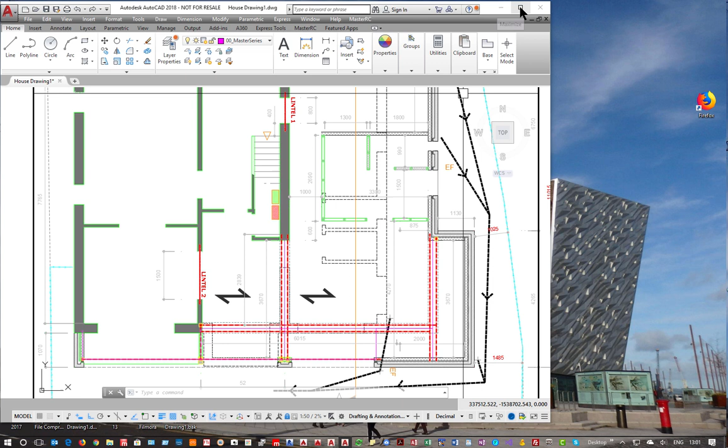I have a little AutoCAD drawing that I've already created for the MasterSeries project. This is a house extension, so I won't go into too much detail. We're extending this out to give a larger first floor area, and then the walls continue up as normal here and here.

I've created an additional layer where I've drawn the members I want to import. If I go to this and change that, it pops up over here, I can change the color, say to green, and say OK. Now you'll see all those structural members I'm going to use are in green. I've just put them onto an isolated layer.

So my first stage is to save this as a DXF drawing, and I'll call it DXF2 because obviously I had a practice. I'll save that, and now I'll exit from the drawing, say yes, and we'll save it as drawing 2 as well. Why not?

Okay, so our next stage is to go into MasterSeries 2017-14 from the 22nd of February, and I am going to import. Now we're dealing with PowerPad licenses, so I'm able to import DXF, but I actually can't import IFC - it should be grayed out. So I'm going to import a DXF file.

I placed it on the desktop so I can quickly delete it. There's my new drawing, and say open. I'm going to bring in the layer called MasterSeries and nothing else - all the lines and polylines - and I'm happy to put it into my U drive. I'll extract. Off it's going, looking through it, and it's found 12 members. I'm now just going to load that frame straight away.

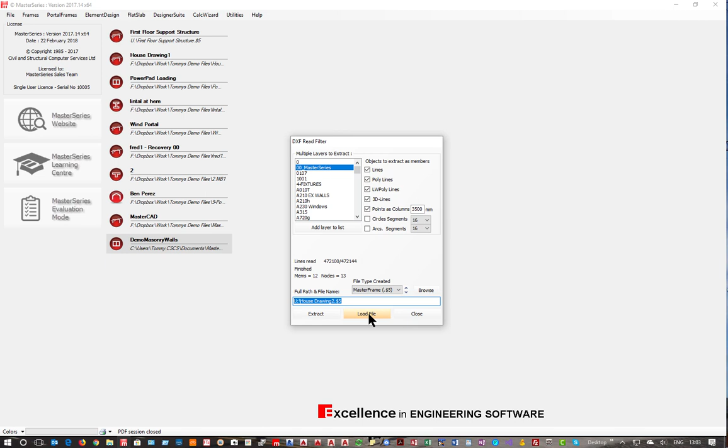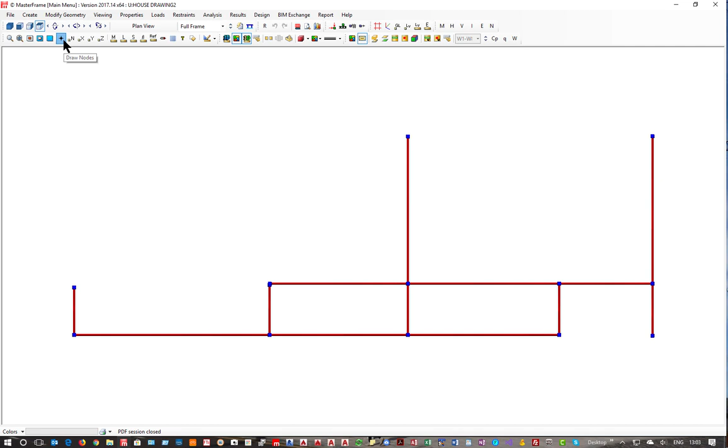And here I go, there is my basic outline of my frame. So what I need to do first, because I didn't draw this very accurately, is tidy up some of the values and dimensions. If I put my nodes on, you'll see where they are. If I put my X values and Y values, you see there's a bit of alignment problem here and here and here. So I'm going to do some X-axis alignment.

So: modify, change, and set all to the common value. Those two are okay. I want to work with these two, and I'm just going to reduce the lines to fine. So I'm going to take these two values and set the X coordinate equal to this - very quickly I make those the same. Those are already the same, and those are the same, and those are the same. So that was the only X coordinates I needed to work with.

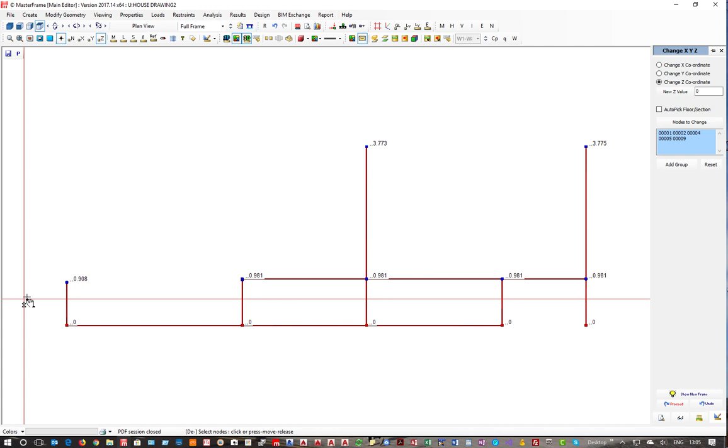Now our Z coordinates, because Z is our other plan dimension, are all jiggly-piggledy along here. So I'm going to come along and change the Y-axis coordinate, reset all of these, and make them a new - not Y but Z - value, and say proceed. So they're now all flush, and these are all more or less in the same line except for this one, so I'm going to do a reset.

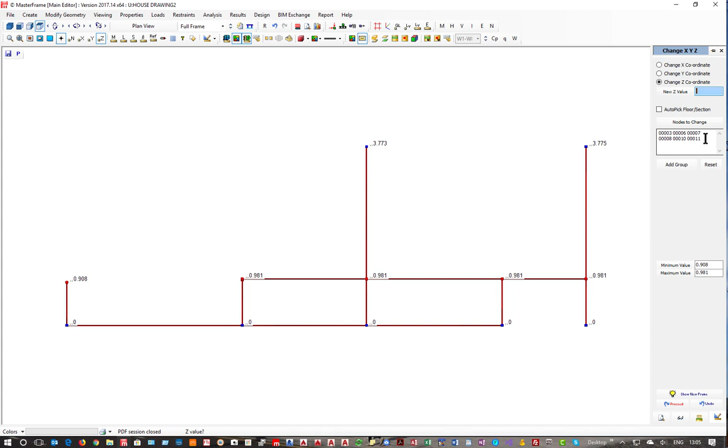I can just take the one I want to modify, but let's take all of them to ensure they're all right, and then choose that as the new value. It's a wee bit fine, so I'm going to make it a meter exactly, and just rejig that about a wee bit, and say proceed.

And then these two here are outside each other. So I'm going to take this one and we'll make it 3.8 meters, and then I'm going to reset and take that and say proceed. So they're now all correct where I want them.

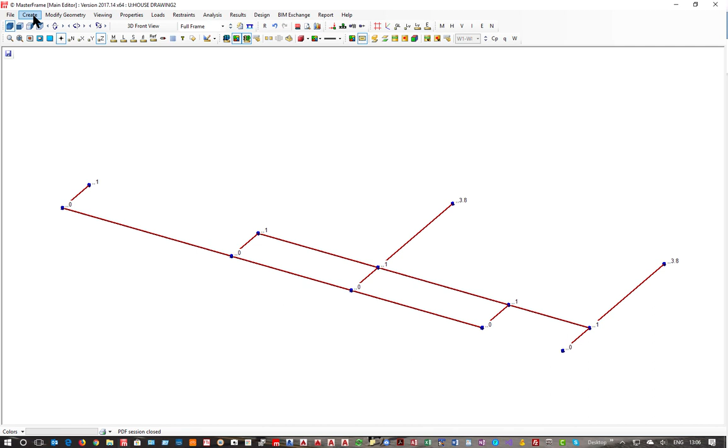Now my next stage is to put some columns in because I just have the first bit. So now I'm going to add some columns. I'm going to create columns, and in this case they're going to be square hollow sections. Coming down and make these 100 by 100 by 3.6, and I'm also going to put them in at 2.5 meters high. I'm also going to add them into a member design group called columns,

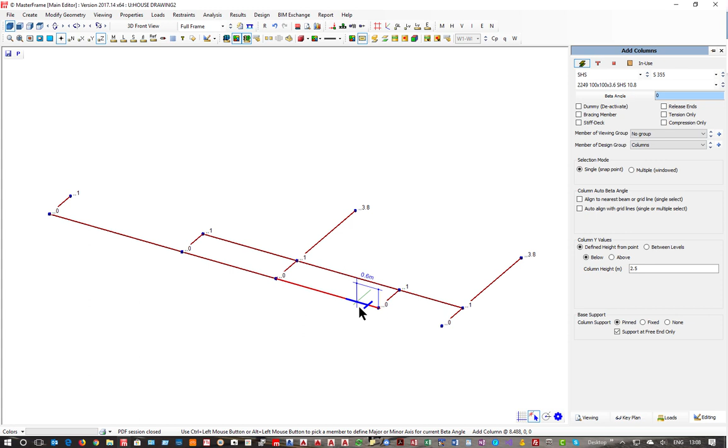and this is something that's new to the PowerPad, in that with the 2018 version of the PowerPad we have upgraded its functionality to include the pro features of MasterFrame, and I'll talk about that as we go along. So first things first, we need to put a column there, and one there, one there, and one there.

And now I want to look at my supports. So I'm still in that column, turn that off, go to restraints, static supports, and I am going to kill all the static supports that exist at the minute. I delete those, delete those. These will be fine, pin with a torsional restraint. I'm going to add in a second set, and it's going to be fully fixed because I will actually do the pinning at the ends of the members as I require them. So there's my 4 supports.

So we're going to span from along here onto this one. So this member and this member are going to come onto this one. So now I'm going to put in my member end releases. And I'm just going to come down and pin all of them here and here. And you'll notice I'm getting something strange happening there, which we'll look at in a minute. So I'm going to have to come back, and while I'm here I might as well do these. See, that's looking at the whole length as one.

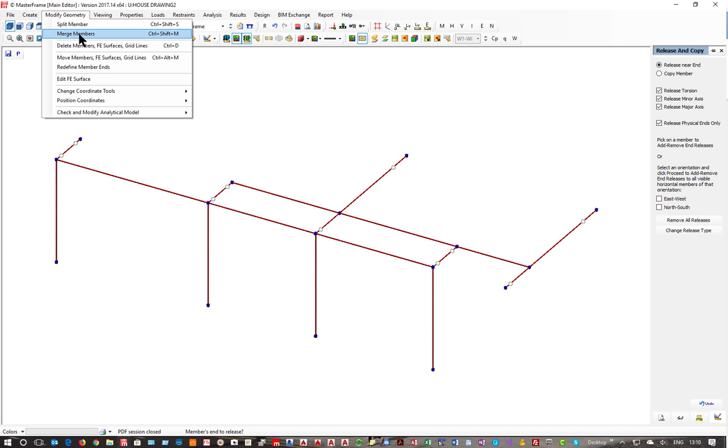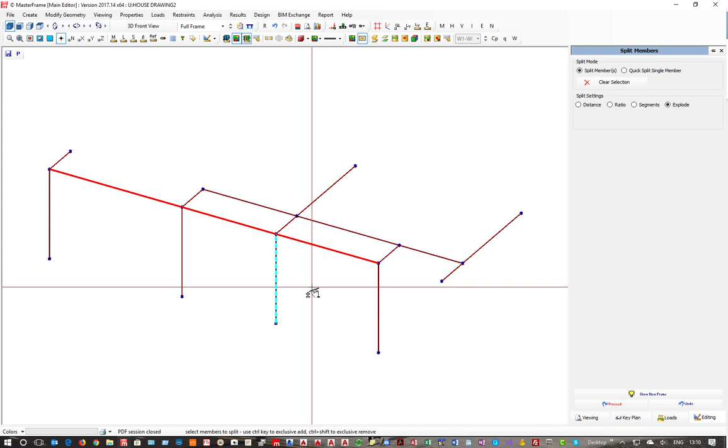So what I'm going to do is come into member split, and I'm going to take this member and explode it into its component members and say proceed. So you got 1, 2, 3. Now this is one member, that's good, and that's a single, and that's one member. That should be a member from there to there, and that should be a separate member. So I am going to take this member now, clear the selection, and explode, proceed. So that's one and that's one.

Now I'm going to join these two together. So member merge, and one of the loveliest things is what they call the quick merge, from that node to that node. So what have we got? If we use the shrink, we will now see how our members are connected to each other, what are real members and what are not.

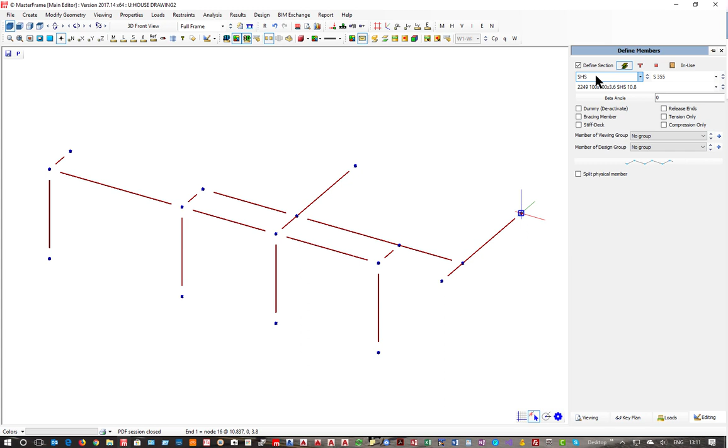And what I do need to do is put an extra member in there I forgot to put in. So I am going to go to create and add a member, and it will be a UC, probably something around the 152s. Let's work with the 152s initially and put that in there. So now we can come back and do our pins.

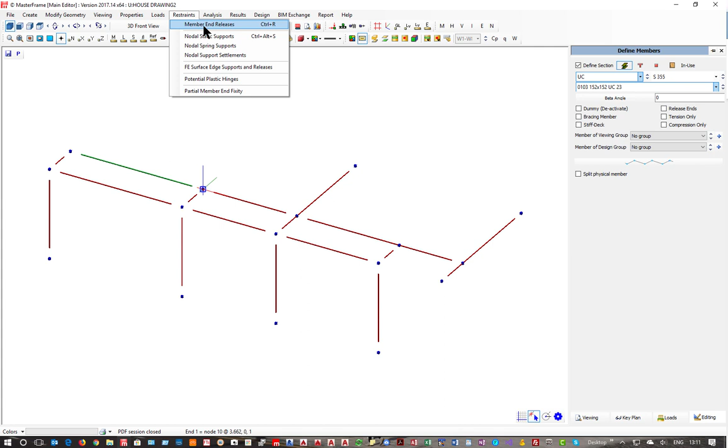So restraints, nodal member end releases. We've got that one. We need to put one there. Sorry, fully pinned there and there. That one's okay. Need to do that one, and that one, and that one, and this new one. So that's that model created from a member point of view. Obviously there are some more things going on to get the loading onto it, but those are essentially the members that I need to use.

And the advantage of doing it this way is that we get the realistic deflections from this member loading onto this member. And this member being supported here may be stiffer than over here, so therefore we get a difference in the deflections. We also then are able to do the connection design automatically, and we'll be able to do our columns, our pad foundations, and our base plates all interactively. And that's why we don't do these one member at a time, 11 beams and 4 columns individually.

What I like to do at this stage, because I've got everything here, is just to analyze it quickly. There's no additional loading other than self-weight, but this will tell me if the frame is stable. And obviously at the moment I actually need to put some properties, so section materials.

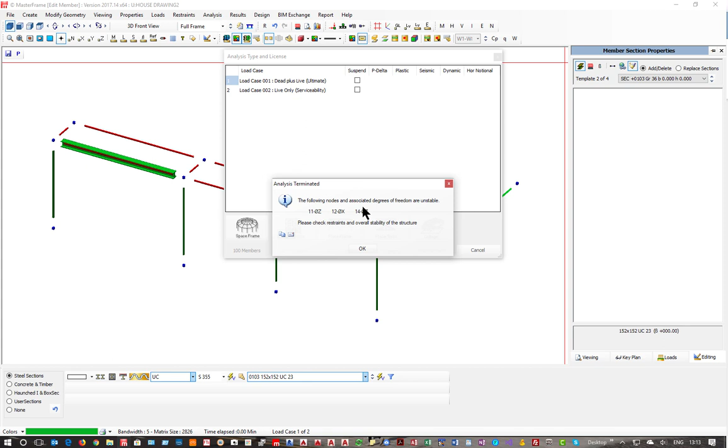And we have 3 unstable nodes. And I know it's here, here, and here. That's because these members here can't be pinned over both ends. We need to put a torsional restraint when we have what we call a physical member that's got nodes in the middle. So all I need to do is go to restraints, end releases, and I need to take off the torsion on one of these two, one of these two, and one of those two.

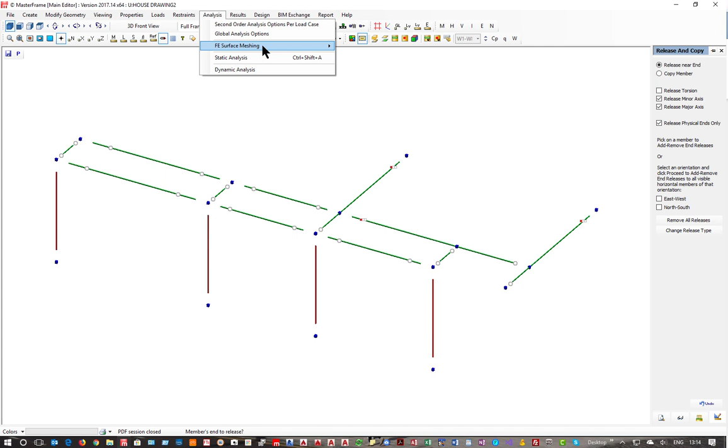If I reanalyze, we should get a solution and results, graphical bending moments. Now this is very, very small resolution because it's only self-weights, but this gives me an idea of how the structure is working before I move on. So I can see that everything looks fine there. It's working the way I think it should work. And also from a deflected shape point of view, nothing is moving out of plane in any crazy way. So now let's go and do our loading.

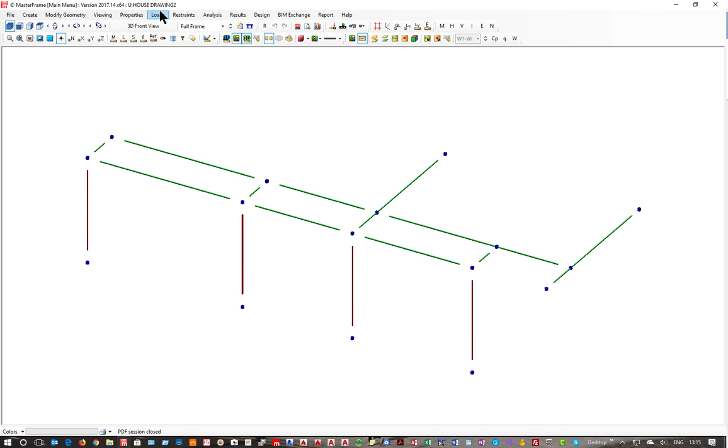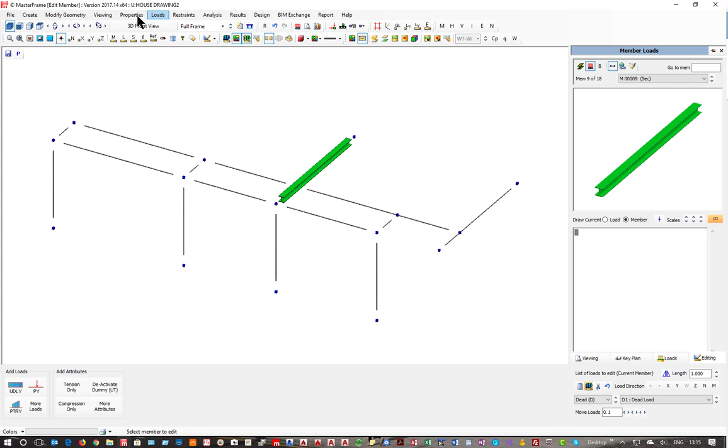Traditionally you would have come along in PowerPad and put the member loads in by going to member loading and put some loads on this member and that member. What I'm going to do is I'm going to apply area loading. That's one of the big new things from the MasterFrame Pro part of PowerPad for 2018. So all I need to do first of all under loading is go to default loading,

and I'm going to use area loading, and I'm going to say my dead is going to be 1.5. So that's not my dead. What's my dead? It's 0.45, I think, if I remember rightly. Let me see. Yes, dead is 0.45 internally, and the live is domestic 1.5. We won't worry about this bit here because this has just got a roof at first floor level because the building steps back in again for the upper walls. And that's all I need to do there.

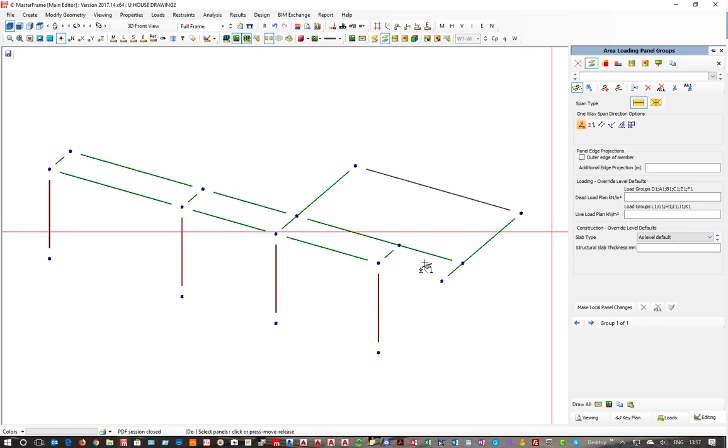What I now want to do is to create my panels. So I can come along and start to create my panels. And immediately I come across a problem, and my biggest initial problem is that I don't actually have enough members. I can do 1, 2, 3 panels, but nothing else. But one of the things I can do is I can add a dummy member. So I can add a dummy member between those two. And here's where I start to get smart. So I can now create that panel. I can add a dummy member with a right mouse click between those two. And that allows me to create that.

Now out here, I actually have a wall along here. So I'm going to do a little trick. So I'm going to add in a dummy member. And I'm going to go from here. Yep, snapping to that point. That's good. And then I'm going to do a right mouse click and add a dummy member from here to here. Right mouse click, add dummy member from here. Yep, that's good. Add dummy member from here to here.

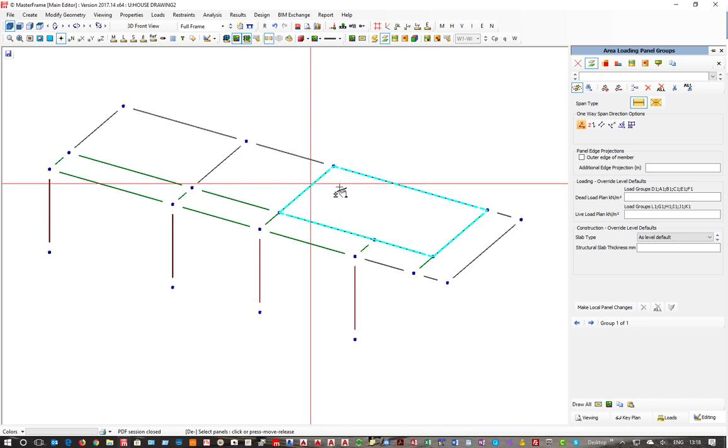What I now need to do is put this internal spanning, so from here to here to here is all with the basic loading spanning that direction. So what's going to happen here is that this load will come onto this dummy member, and from the dummy member it'll run back to the 2 nodes, and of course that node's got a support on it anyway, and that node will have a support on it, so that will then just be forgotten about because it's looked after by the wall that's underneath, and we're not designing that. That wall actually already exists anyway.

So the next thing I want to do is the outer bit, this extension bit. So I'm going to add, that's the inside, and then what I'm going to do is I'm going to add another one called outside.

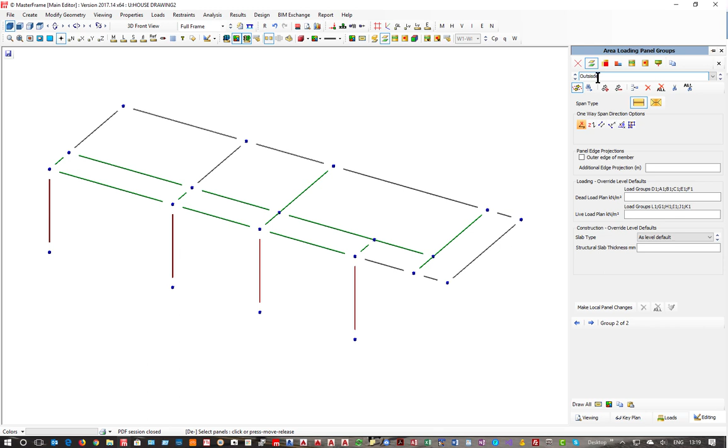And then I'm going to come along and highlight these. Of course they're now spanning the wrong direction - well, that one's spanning correctly, that one's not. I could change the direction, so that one's now wrong, or I could just say, use the shortest, and in this case it works.

I do have the facility, obviously, to override any of the panels, for example the direction. I could have changed it so that direction is XX or YY or back, or not override, so it's now working properly.

So those are all going to track their loads, but in this case I want to change the loading. We're not making changes, so we're doing an override load, and the override load is quite interesting - it's a lighter live load, but a heavier dead load because of the tiles. So the dead load is 0.6 kilonewtons per square meter, and the live load is 0.75.

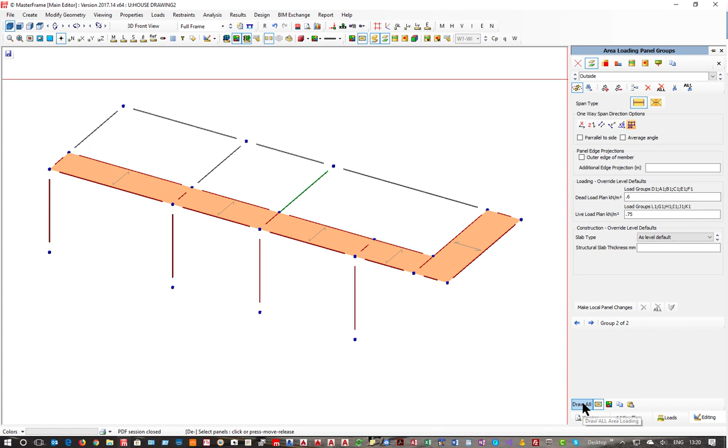So if we look at our areas and draw both of them, draw all, we will see they're different colors, different intensities, and spanning different directions.

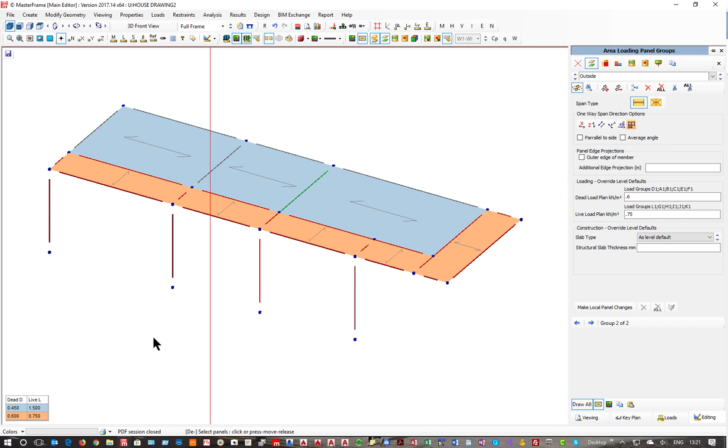So all we need to do now is to stabilize all these dummy members. We can do that quite easily by adding in some more static supports. If we run down to our fixities, we need to put a dummy support here, here, and here, and everything else is then supported directly or transferring to another member.

So that is my area loading. The next thing I want to do is apply the two wall loads. So if I have two wall loads here of 10 kilonewtons on this one and this one from the walls above - under loads, line loads, and in apply mode I'm going to call them just walls. I'm going to apply it there and there, and say it is a dead load of 10 kilonewtons. There it is.

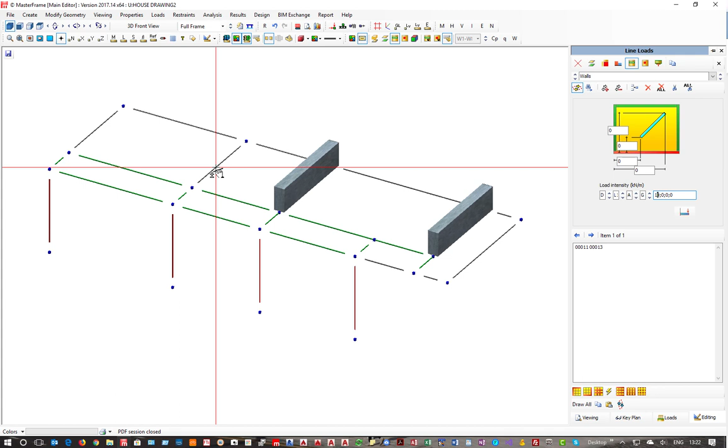And then what I'm going to do - it wouldn't even matter if I put a wall load on that one, because it's going to go from the dummy member straight down into the two fixed supports which simulate the wall underneath. I'm going to add another one, and this is going to be wall and roof, all the way along here, here, here, and here.

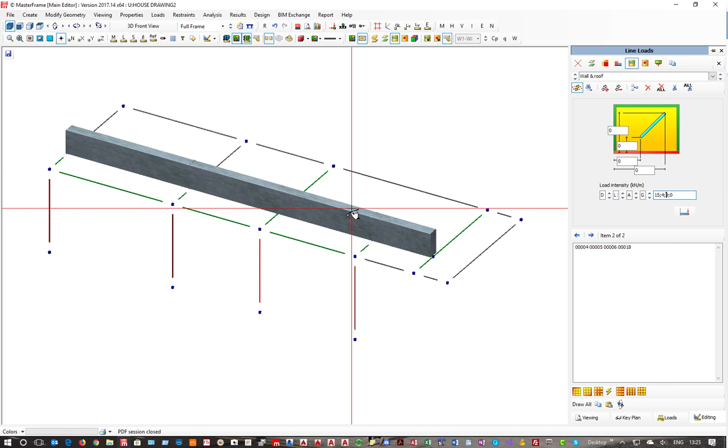It never draws anything until I start to put values. So I am going to put 14, and I'll make it 15 actually, and 4 for the live. So it's getting a 4 kilonewton live load coming onto this wall and down onto the beams, plus the self weight of the wall, plus another 5 kilonewtons for the dead load of the roof structure as well.

So now, what have I got? I have, in essence, all my loading applied.

What I now want to look at are loading cases. Because I'm doing domestic, I don't want to have too big of deflections - I want a dead plus live service case. So I've got automatically the two cases here, and you will see that it's 1 and 1.35 as our standard Euro code information.

And what I'm going to see is that it is going to add another one of those. So I'm going to come back to the cases, dead plus live ultimate, and just say add service. So it's going to create me a serviceability case of 1 and 1 for the dead and live.

And because this is a small domestic project, we don't need to worry about any stability, because it's all going to be attached to the walls and bracing, and it's not going to go anywhere. So it's just all vertical loading I'm interested in.

So the next thing, you would normally run along now and design it, but I want to take a step back before I design, and I want to create some groups - again, a pro feature that is now available in PowerPad Plus.

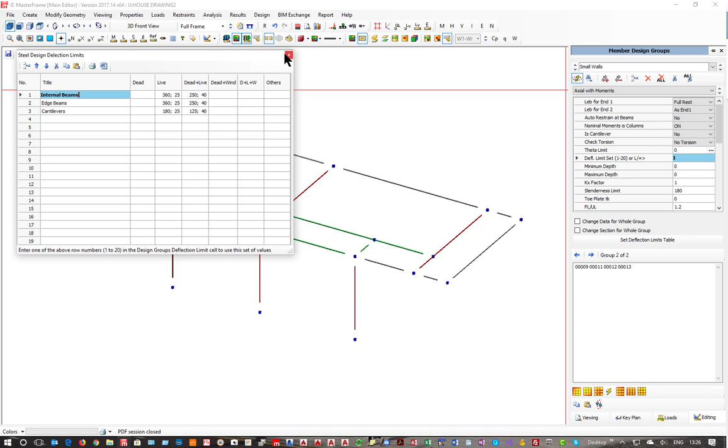So we're covering it because dead is more critical quite frequently in domestic situations. And we're going to set a maximum depth. I can tolerate a 203, so I'm going to set 225, and I want both of those to be the same section size. Now also they have loading coming up on them, which we'll look at in a minute, from the walls.

So I'm now going to do the other one, which is the big walls. And I'm going to take this one, and this one, and I am going to say that it's actually unrestrained because it's running in the same direction as the floors, so I'm not going to rely on this stabilizing it. So I'm going to say it's 1L, and I'm going to say it's restrained at incoming members.

So yes, so this one here, which is longer, will be restrained by this. Or we can say no if you want to be more onerous, play safe. I can say no. Again, deflection limit I'm going to set as table 2, and the maximum I'm going to set as 225. So done those, done those.

I'm now going to come along and add in a group for my front members, and they are going to be that one, and that one, and I'm going to just say they are going to be 1L and leave them at type 2. Now, same section size for all of them, and again I want to keep them smaller, so I'm going to set the minimum maximum depth to 175.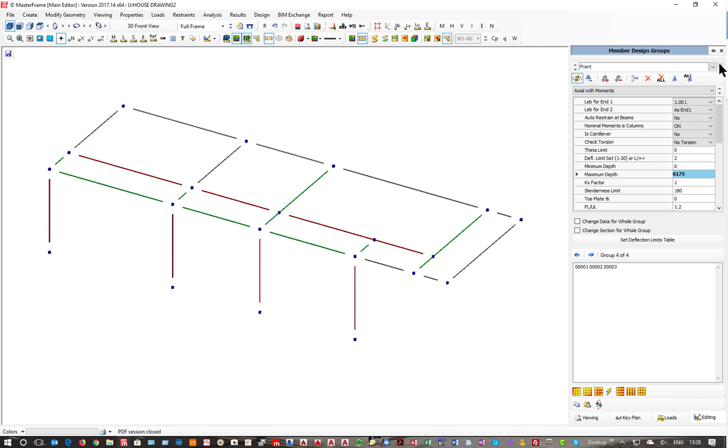I always go slightly higher than the section, 152, because 152s are slightly bigger when you get into the heavier weights, so I can tolerate up to 175 depth, so be realistic about that. Now, if I move back, I forgot to set these to be the same section size.

And then finally, ties. And in ties I'm going to choose this one, and this one. So they're little ones, that's obviously part of the big member. You don't really need to set anything in those because they're very lightly loaded, and they will come in at to be 152s, or we could go in those cases for a UB instead if we want to keep them in smaller situations. But perfectly honest, I feel that you'd be better just sticking to the same type of section. So that's my beams and my columns all set up.

Where does that help me? Well, when I go into design, steel member design, you notice all the dummy members are now dropped out. You don't see them. Space frame, at 100 members, and automatically I suddenly have all the design checks here for me, and I can see that my initial 152 isn't going to work. So let's go for lightest and auto size, and it's coming up at a 203 here.

Now that's fine for that one, and that's okay for that one. What about these members here? If I auto size, it just about works for that. Now, if I was to come down to the 37, we just have a slight deflection problem.

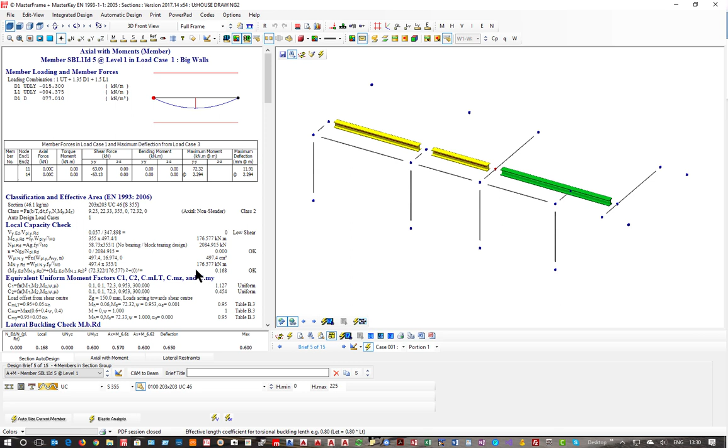That means that not just deflection, but the rest is now a problem, which means that we do need to go up to the 46. So destabilizing load, it still works. And these now work. And what about these ones?

15223s are fine. You could possibly think about reducing those in weight by going to a UB if you want to bring in more section sizes. And 15289, because we've said we can't go above the 200 or thereabouts, we would put those in.

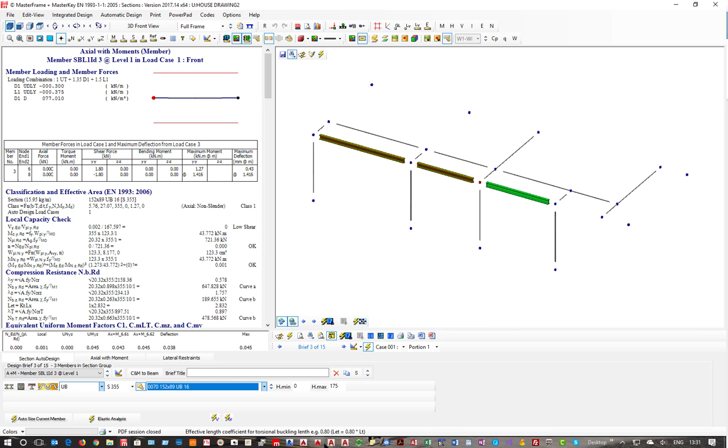So similar, slightly lighter. Now my columns, again, I'm seeing that a 100 by 3.6 works. It doesn't work here by 40% because that's carrying the biggest load. So moving up one at a time, we will find that the 120 by 4 works. I prefer a 5, so I'm going to go up to the 120 by 5.

Now, I've set some limits externally. I can also set other limits by using something called a section filter, and here I can say that for square hollow sections and everything, I want at least a 5mm wall.

It just saves hassle. Whoa, did I say 5mm? What did I just do? That's interesting. T-min is 5. Oh, I think it just dropped out the 4mm and went to the biggest section. It's just plain sillies. But you should find that we...

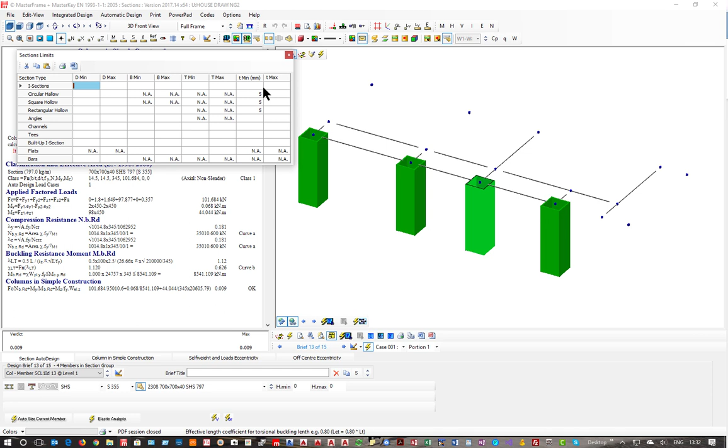Close that. Yeah, we still have all the sections, but at minimum 5. So auto size that, and we'll come up to it being within 5%, and it's asking are you okay at that or not? I'm going to say no, no, no. I want to go to either the 100 by 6 or 120 by 5. So I think the 100 by 6 will be good enough, and it keeps it inside the brick.

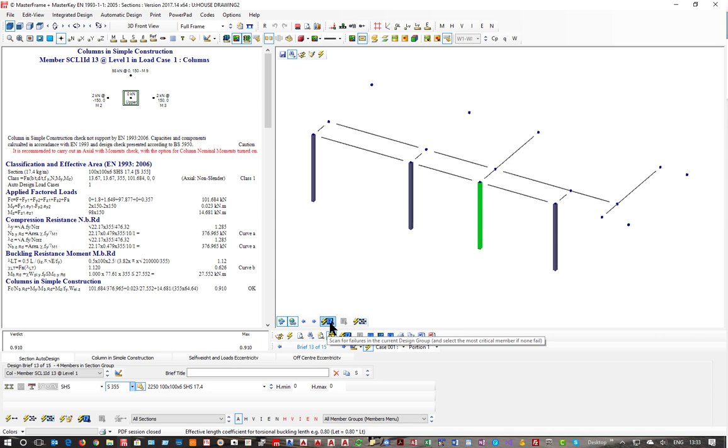So there we go, that's my steel members. And naturally, I could have done them all using the auto design and designed them all in one go. But what I'm going to do now is just scan for any failures, and everything says it's clear.

I'm going to reanalyze it. Not important here because nothing is indeterminate, so there will be no failures due to changes unless the self weight has suddenly changed drastically, but they're all fine.

And we will see the unity values for all the sections, with these wee ties taking absolutely nothing. Did I size those? I kept them the same, but they clearly again could come in as the wee UB joists at 152s to save yourself half the weight. Since those are going to be joists, those can be the same. So that's my steel done.

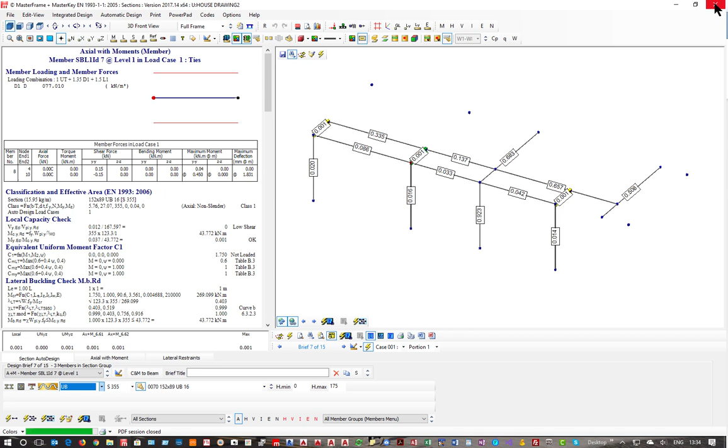Now, the next thing I want to do is to design my connections. And before I design my connections, I'm going to create some connection groups.

So I am going to say that I have beam to beam flexible here and here and here. So I'm going to go in and apply that there and there and there. You don't really need it over here because they're, well, you do, I suppose, to an extent, but because they're just bearing onto the pad, that's just going to be one member, hopefully, and that will just join into it. So you wouldn't need the joint there, but you need it there and there.

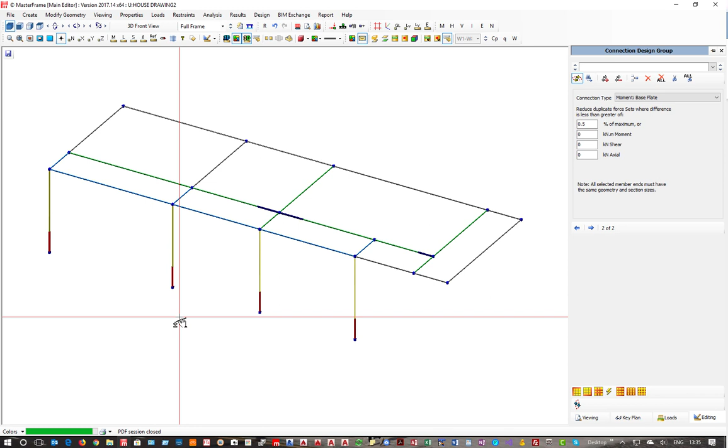And if I go ahead and just call that beam, and then add another one, this time I'm going to do a base plate, and add them all in. So we're designing all 4 of them in one go. Sounds reasonable. Call that base.

And then I'm not going to do them all, but what I'm going to do is add on a third one, and take this joint here, and I could add in the others if I wanted to. Actually those are the simple ones that can all be done together. This one, even though I choose it to be in the same group, it will actually refuse to be in the same group, and that is going to be a simple beam to column fin.

So beam to column fin is there, base plates at the bottom, beam to beam flex, and back again. So we've got 3 sets of joints set up for us. We don't need to do them all today.

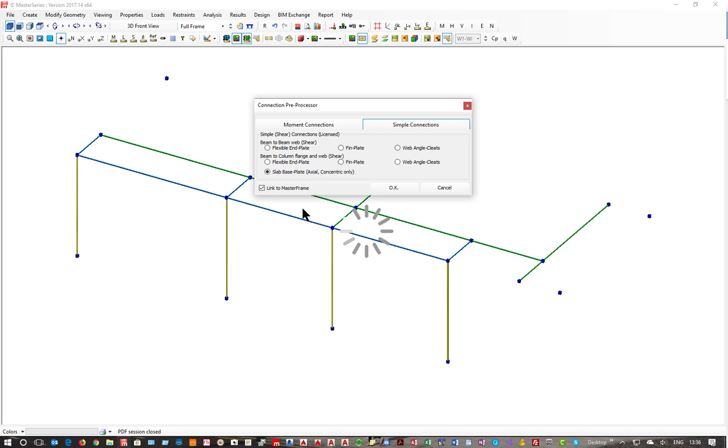Now I go into my steel design and reanalyze, and it's just going to ask us some basic information, and I'm going to say yeah, happy, and I'm going to go for a simple connection, and let's just do the base plates first and say OK. So when I choose this base plate, the others will be highlighted with it, except for this one. I think I must have missed that one in the grouping.

What I'm going to do actually is just come here, and sometimes it's better to work in wireframe so you can see the colors better. Yep, that's better.

When we release the 2018 version, you will actually have a newer graphical display which will give you more clarity. So for my base plate, first things first, let's come in from the 100 by 100 column and make it a 300 by 300 base. And immediately everything's okay.

I don't think we need a 20mm plate, I'm going to go for a 10mm plate. And those bolt positions are okay, but if I want to be more practical and give more stability to the system, I'm going to go for an inner edge distance of 200, which gives me 50 edge in each direction, and then to the other group, exterior, 200.

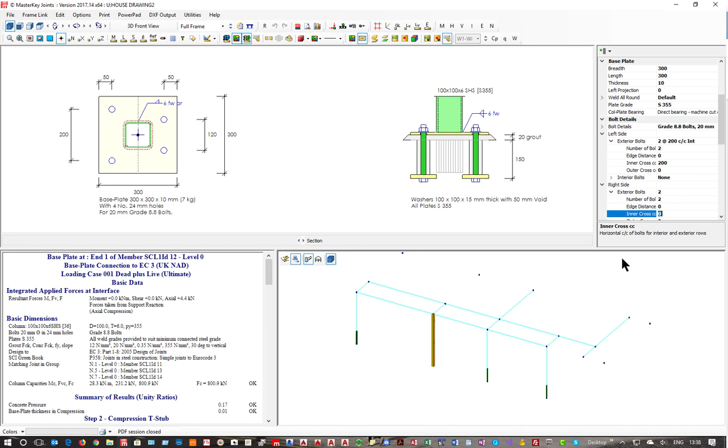There we go, all set out, all fine. Let's look at our next joint - I'm just going to turn off that bit, come back here, add another joint. It's going to be a simple connection, the beam to beam flex. So I'm going to go for the beam to beam flex at this point.

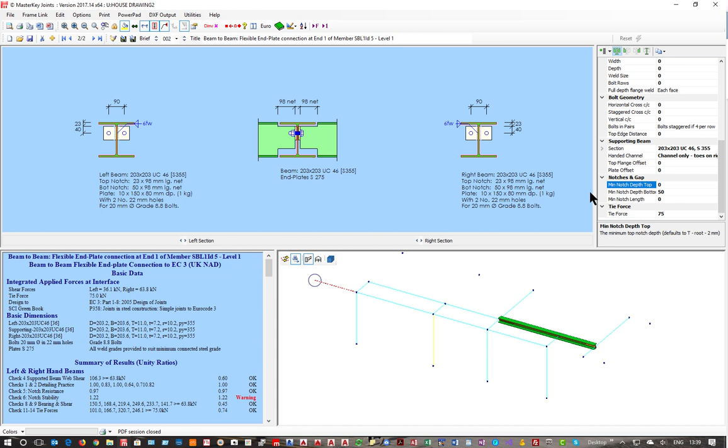So it's going - oh my goodness, I cannot work, I am in trouble. And that's because the Green Book uses a standard notch depth of 50mm, which is lunacy. I'm going to put this down to 0. It says 23, so I'm going to say, right, let's go for 25. And let's now go for 25.

So now we've got the notching that we need, but we're still failing in certain depths. We need a deeper plate, so we need to come along here and insert another row of bolts or deepen the plate. I always find the easiest is to just put in 2 rows of bolts, and it's now looking okay.

I need to do that on both sides, so go up to the other side, 2 rows of bolts, and now the joint is working. Happy up here, happy up here. So there's that, and you'll find it's taking the forces from the similar connection as well.

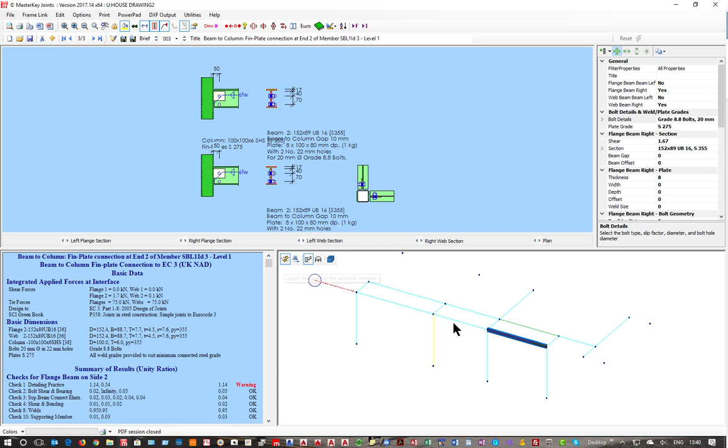Then I add in a third joint because we did 3, and that is a fin plate to column, and say OK. And if I apply it here, it's going to be more or less okay once we get this extra bolt in here. But what I'm going to do instead is reapply it to this one, and it is going to be much worse in its design.

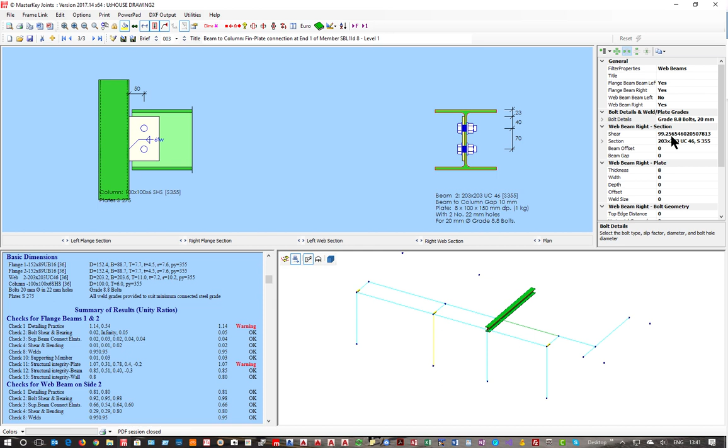At this stage there's just too much on the screen, let's look at these - that looks okay. We'll see that it is only the flange beams that are problematic. So let us move across, and the shear is slightly accurate at 99.256. Oof, we should really just put that to 3 significant figures.

Let's go to the 2 in the other direction. We need to get into these wee 152 beams. We need to slip enough depth to get this other bolt, and it's a wee bit awkward, and that's one of the reasons we can get clobbered using these very small sections - we just can't get connections that work.

So let's put in a depth of section - it's 152, let's put in 100. That's not enough. 120, 130 - too much. 120, that looks about right.

And the other thing is the bolts, we need to reduce the bolt center, so we can take those and pull that up to 50 mil apart, 2D, which is touching on the limits. So vertical centers 50, and that's now inside, but I then need to look at this other side and come down and do the same here. I said vertical centers 50, and I also said the depth of the plate was 120.

So we're nearly there. We've got this integrity problem, and it's the beam integrity. If I come down and have a look, we will see that it's the bearing here, and we are at the minute possibly looking at tie force checks. So if I go in and turn off tie forces here, apply and close - in our case we actually aren't doing multi-story, we don't have a need for tie forces, turn them off, and everything works here happily.

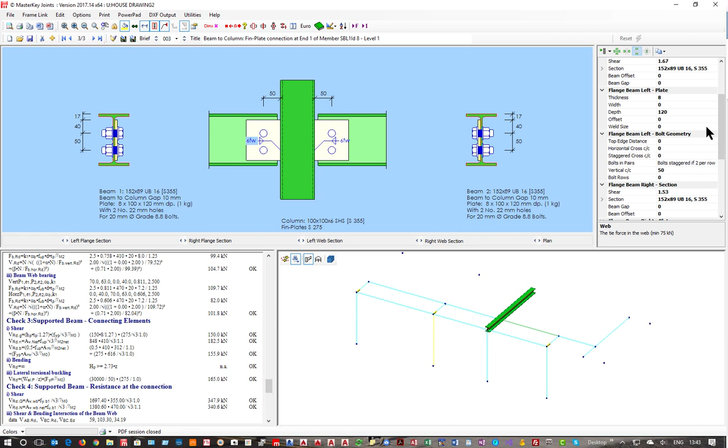So change that to 16s. And suddenly with 16s we actually end up with a slight failure in the bolt group, so we probably do need 20s in one direction at least and 16s in the other, which is not something we can do at the moment. We assume they're all the same, so put that to 20, and we can just pull the edge distance up to make that better.

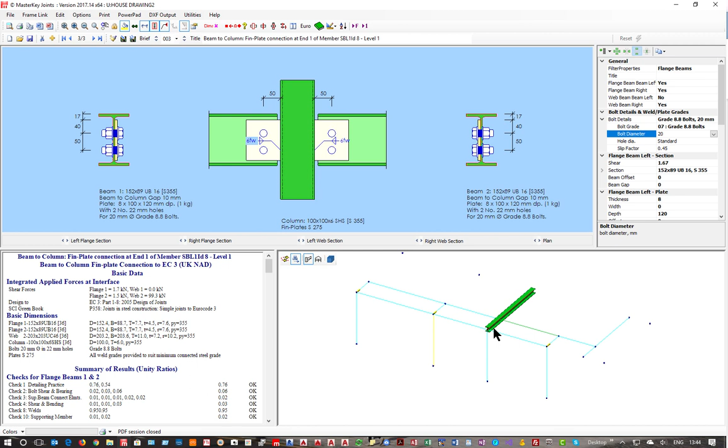That's shearing down, so we're bearing on this. Better to have lesser at the top than the bottom, so we would pull that up to 30 mil at the top. But I'm not going to walk through and do that at the moment. I just want to keep going here on the system. So we've done our panels, we've done our beams, we've done our base plates, we've done our connections. What's next?

The next thing to do in this job is the pads. So first of all, we're going to pluck a value out of the sky, and I'm going to say, oh, it's not brilliant. I'm going to go for 100 Newton safe working pressure. I'm going to have no cohesion for sliding. Passive, I'm going to put in a 0, so I'm not going to take any passive. Bar style,

And it comes in with a default, which is 750 by 300 base, and everything is happy. We have no problems. This is a more critical one. That's the most critical, and it actually went up to 950. So what we would do here is we'd say, let's make this a meter, and happy days. So 950 pad there. Everything else can be 750s, and everything's good. And we're getting consistent

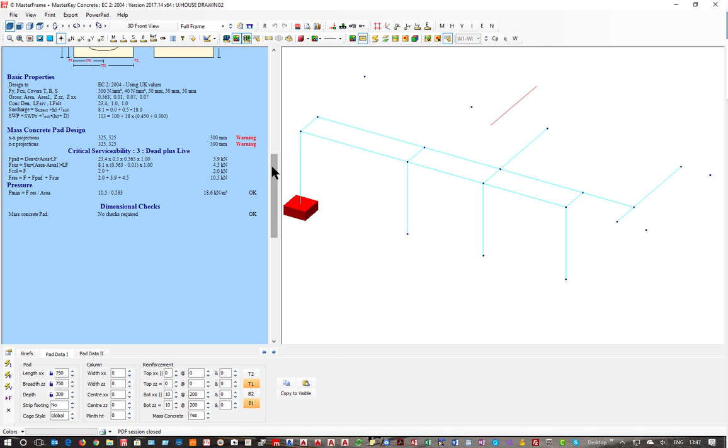Now, we can also do mass concrete. I can turn it on to say, yes, I want to use mass concrete. And now it looks at this distance and allows you a spread. So it's saying you have projections of 325. So I could increase this to a 325 or 350 deep pad, and 750 by 350 as a mass concrete pad will work. And that is that done.

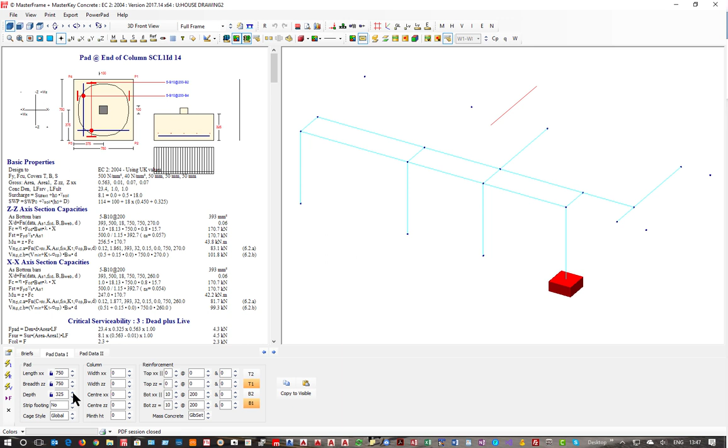So you can make these mass concrete at 750 by 300 or 350 and keep that one as reinforced if that's what you need, and everything's done. So in 52 minutes we have managed to do importing from AutoCAD, adding new members, adding new columns, putting on our area loading, designing all, I think it's 15 members, designing nearly all the connections. There were probably 2 more we needed to design, and designing our pad foundations, all within PowerPad.

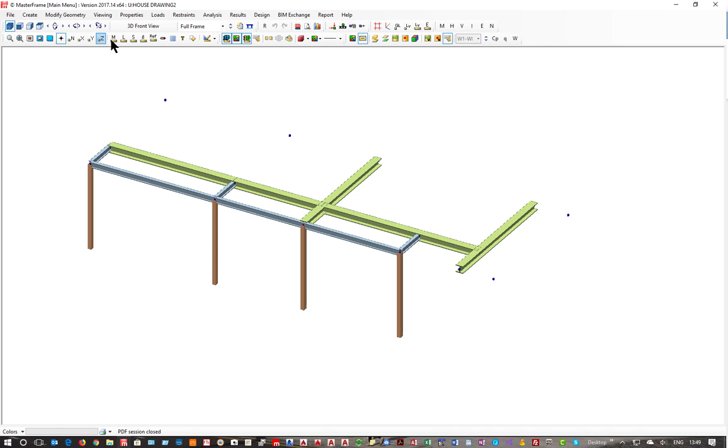So what I'd like to look at now is a wee bit of the reporting. So I'm going to come out of here and say yes. So there's 2 ways of reporting. There's just the normal way of going and printing out results. So I could just take this, turn on 3D, turn on my section sizes, and I could print that to printer straight off, print graphics, and then do the next stage and the next stage. Or I can go for creating a report using the report generator.

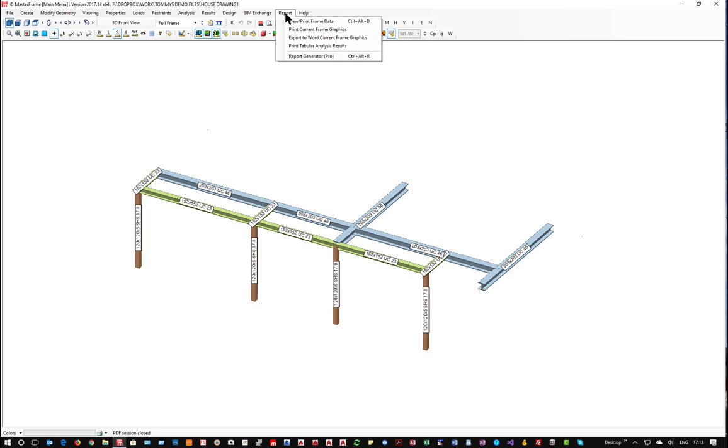Report generation. So if I go to report and report generator, I can start and build up a little set of outputs for myself as I see fit, and add them in, and say, for example, in joints, when I go to customize, I want all briefs, summary, and selected loading cases, and apply. So that's going to remember that. And member diagram, I want that member, and cancel, because it's not really member diagram.

I want, it will be graphical output. So I'm just going to remove that and go to graphical output and add, and then come in and say I want bending moment at those scales, and apply.

Instead of doing all of that, just say OK. So it's now taken that set and brought that in, and we're going to have a snapshot.

It's going to try and generate snapshots for us - front, rear, and so on - and I'm going to add or remove snapshots. In fact, I'm just going to save that, close, and save the changes, yes. I'm going to create two snapshots.

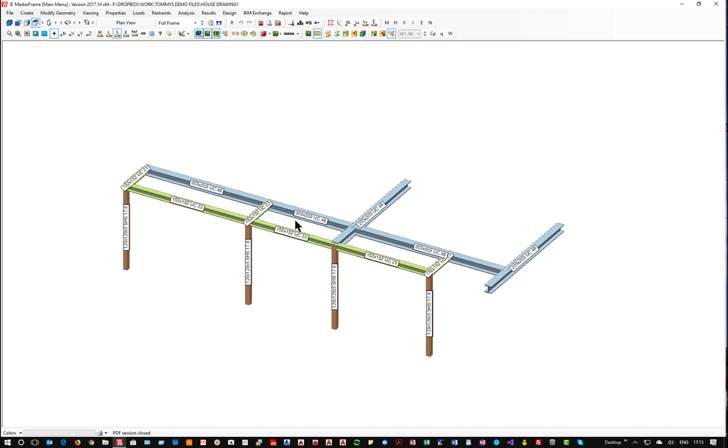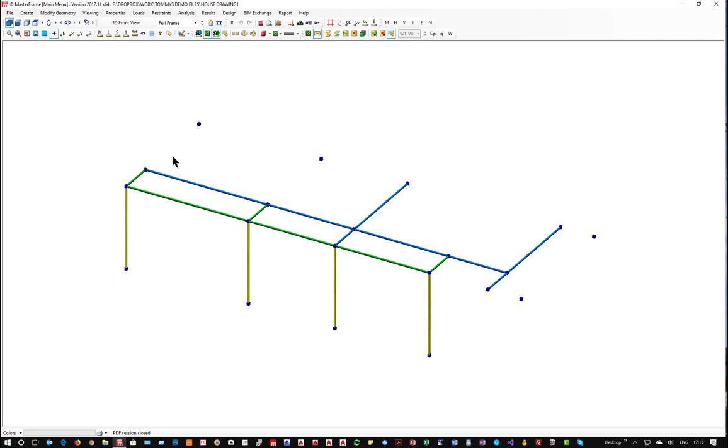So right mouse click and add snapshot, and call it 3D sections. Then I'm going to take off the section sizes and go back to wireframe, because what the snapshots do is record everything that's on the screen here.

Back to wireframe, don't need my nodes, and I'm going to go for black and white, and save this as my other - zoom in a wee bit first - add snapshot, call it 3D wire, and save.

So if we come back to our results in our report, which you've got here, we can say we first of all want it to display - not that one, but the full 3D - so I'm going to give a full 3D view and apply.

Then for the frame load diagram, we're going to use Dead plus Live Ultimate, and we're going to use the 3D wireframe as my snapshot. I'm going to take this one out and add it in, because the snapshots are dependent on the project - they're for each version.

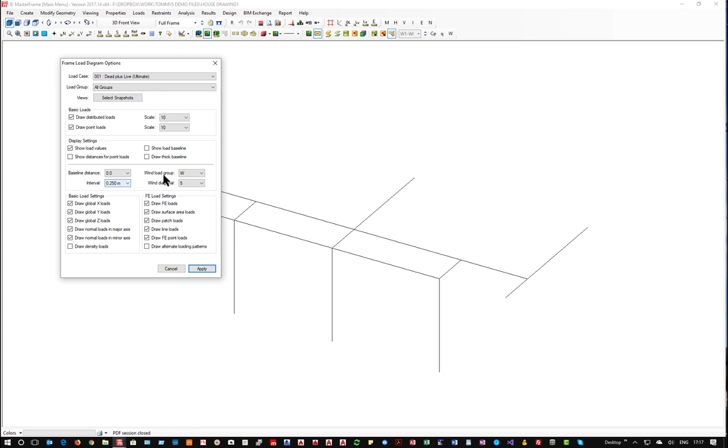And we'll go for distributed loads and point loads, and we will have FEA surfaces, patch loads, and line loads. Just say apply. Then for graphical output, we can select the loading cases we want.

We're going to go for a snapshot called 3D wire, add and apply, and just say we want - yep, that's the one - apply.

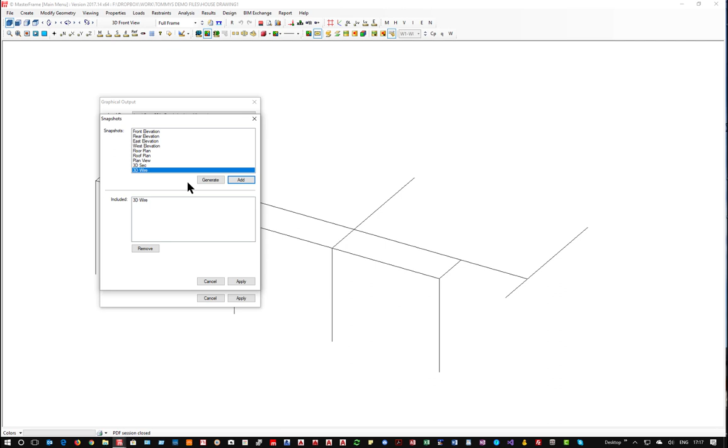Another graphical output for deflections - loading case is correct and I want 3D wire, add, and apply. In fact, for deflections, I would choose Dead plus Live service as my output and show values, then apply.

Then for steel design, I'm going to give all the loading cases, do the critical for each, and only critical portions, just printing the summary. The second one is all the detailed outputs, again just for the critical sections - critical sections in each group, apply.

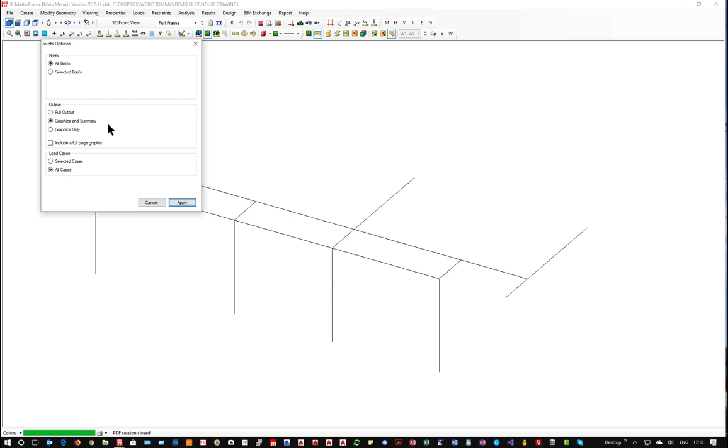Very simple - connections is, as we said earlier, full and graphics and summary only. Apply. Concrete design is going to be the full.

All I need now is to set up where it's going to go - in my case PDF Creator - save, and now I can sit back and generate the full set of information coming out, running along, going to the PDF writer.

As we can see, we've done three pages so far, and it's going and putting out the rest of the design checks. Now it's ready, and I'm just going to put this into my desktop, always the best place to put it.

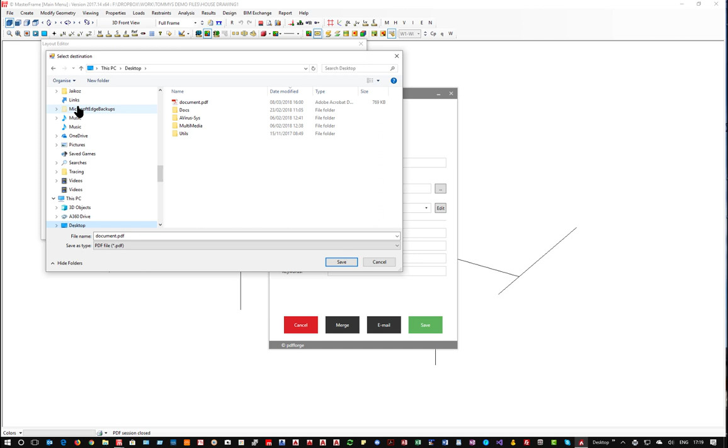So that I can just delete it afterwards. Say save, replace, save - off it goes, and here we go, in it comes.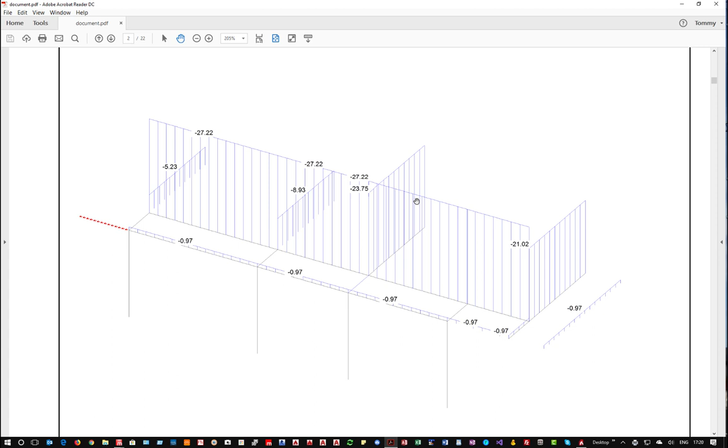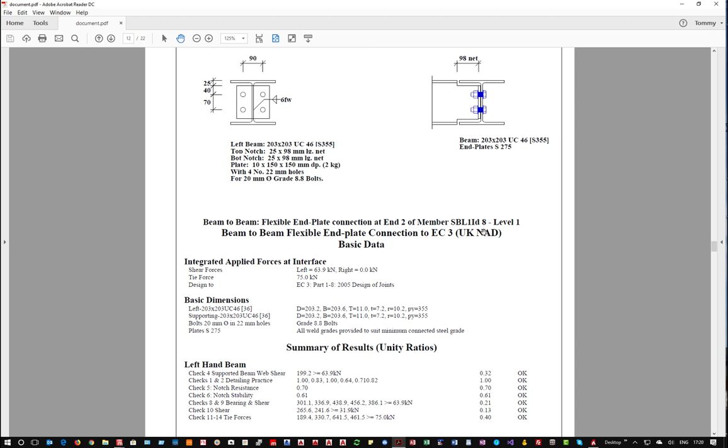There's your initial drawing, there's your loading on the structure, there's your bending moment diagrams, there's your deflected shapes, there's your summary results giving us all the passes, and then the detailed member results - five members done, and then the connections, and finally the base plate.

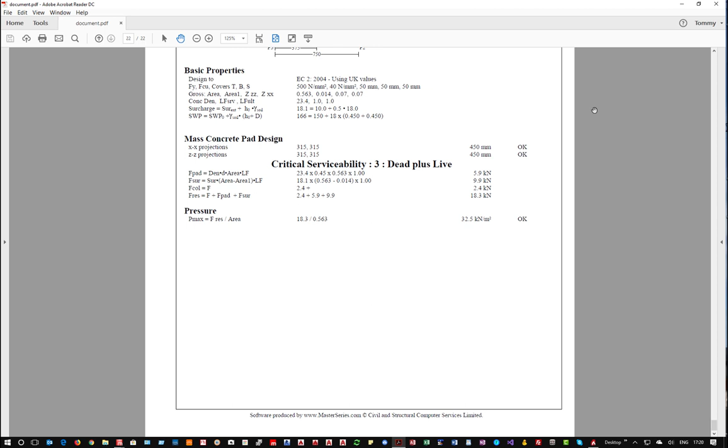So all done automatically through a report generator, with a lot less work involved by you. And I'll just close.

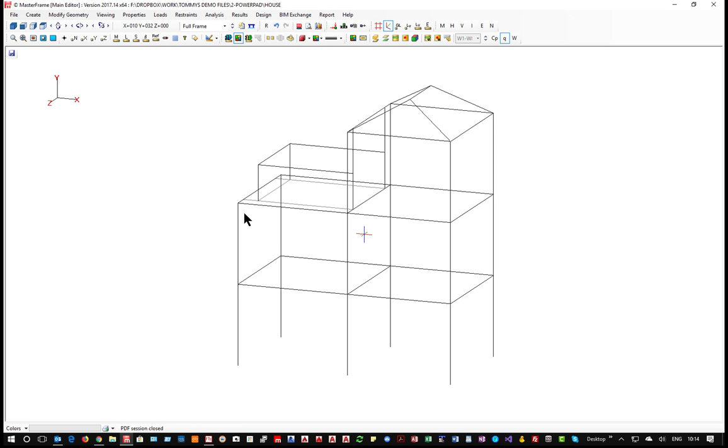It's like a little three-story house with a pitched roof and a balcony at third floor level. So just going into loading, we can go into wind panel loading, and the first thing we'll do is we'll set our directions we want to consider, and we'll just ask to consider all 4 directions since the frame isn't symmetrical, and we will ask to use MasterKey wind analysis.

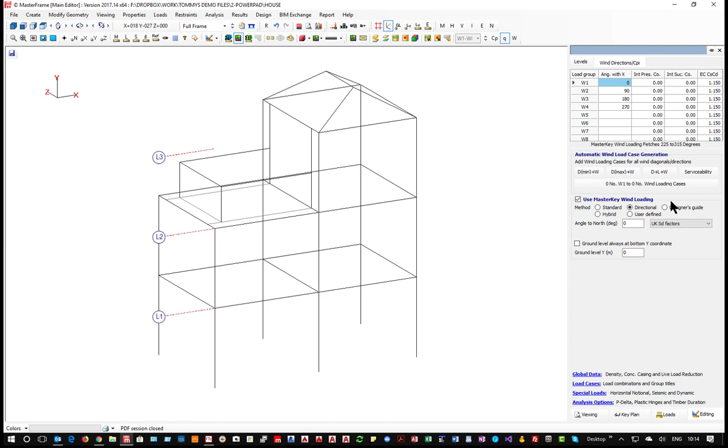And then moving forward, very simply, we would look at any global reductions, and since this is a small frame, we don't need to look at any reductions. Site data, we can choose any site in the UK or Ireland. I can switch over to the Irish maps or back to the UK. And for the UK, we can actually choose a location. So if we come in, we can choose a location here,

or what we can do is run to a little website called Grid Reference Finder, and if I just zoom in on Norwich, I can find my location from postcodes, or in this case I'm just going to go and say that it's in here off the ring road. So we're going to put a pin there, and then we're going to grab this 6-figure grid reference back to MasterSeries, pop that in, Control V, and press enter, and now it's located there,

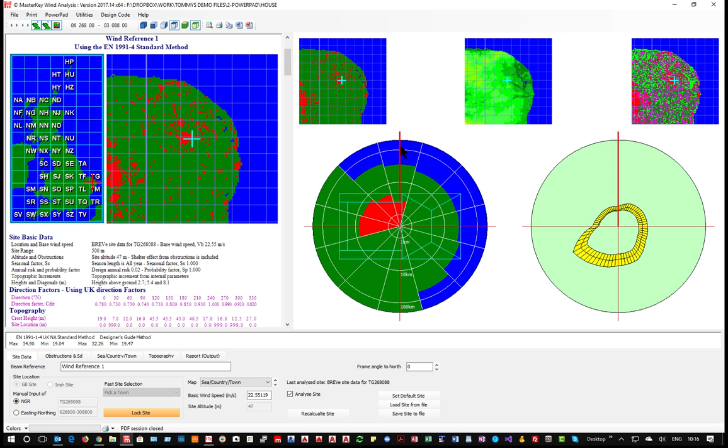and I just lock down that site. And the only other thing I need to do here is to rotate everything so that I have the right orientation of building to the north, and then just check back as to my method is the Eurocode method. I'm going to go for the designer's method with Eurocode and exit from that. So that's the wind basic pressures set up. We know what the basic pressures are for each wind direction. We now need to create the panels and work out the coefficients on each of the panels.

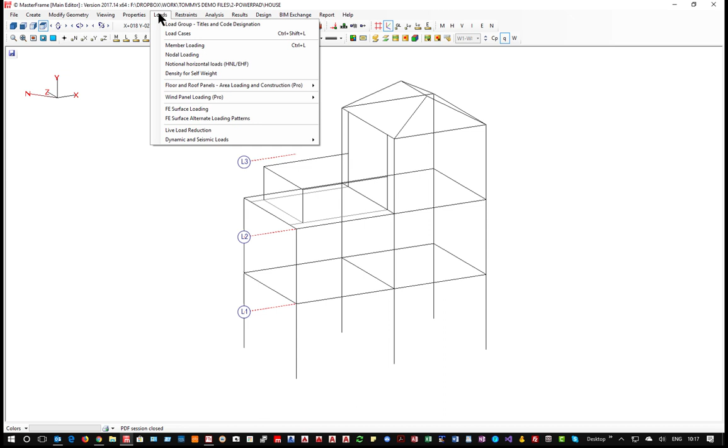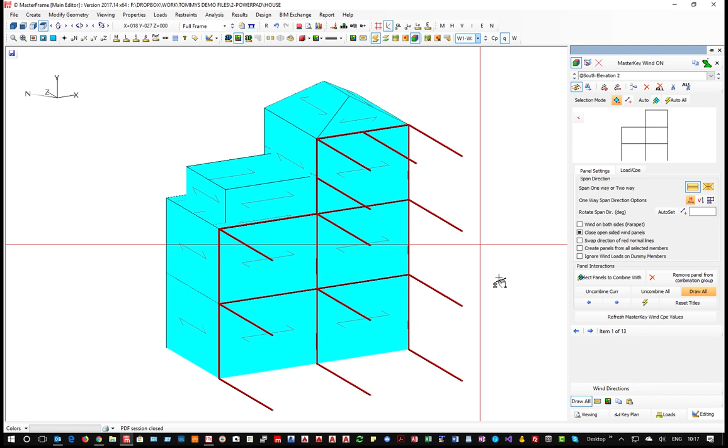Again, very, very straightforward. Under loads, wind panels. We just define the panels very straightforwardly. So if I was to come in, I could say that is a panel, and I can say whether or not it spans horizontally or vertically, or two-way spanning, or even shortest. So I'm going to span this horizontally, and then I can't choose another panel because it's not on the same plane. What I am going to do is I'm going to kill that, and instead of going through them all one at a time, I'm just going to say auto, and the program will attempt to find all the panels.

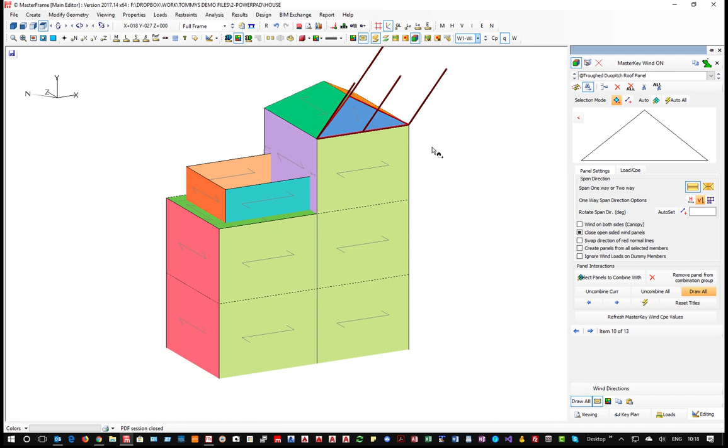So let's color them up, and you'll see that these are identified as being parapets, and I just need to do 1 or 2 things. I need to go to this panel, and I need to tell it that it's spanning that direction, and I'm going to change my rafters to be spanning vertically through my trusses, and then just do this last one vertically. So everything else here is working as we would expect, and they're all horizontally spanning. There's no reason why we couldn't have a two-way spanning wall as well. And that's it. It's very simple.

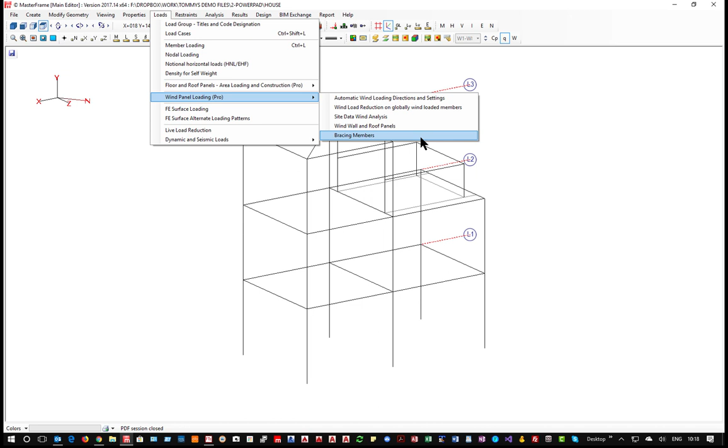Loads, we've specified everything. Bracing members, we didn't have any in this case. It's a fully rigid frame. But if there were any bracing members, just like in the area loading, we would isolate those so that they're not attracting loading directly to them. Now, if we display area loading, we get the little colors, but we can also see in any direction, W1.

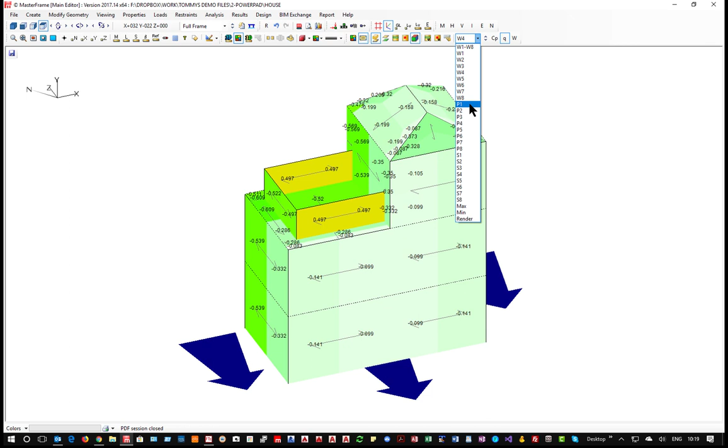So there we go, wind blowing. And we will see that this is a higher load than here because it identifies it as being a parapet loaded on both sides. W2 blowing on side, W3, and then W4. So not very high loads because we are down near the Wash in south of England. We also then look at the W1 but with internal pressure. So with internal pressure things got a bit less. And then finally internal suction. So things get a bit higher.

And if we were designing cladding, we can actually ask for the maximum positive pressures and the maximum suctions, and we can see on any of the members what the maximum suction is on this surface. The suction is up to 0.732. So that's a wee quick run through the wind analysis for you, all part of the PowerPad Plus in 2018.